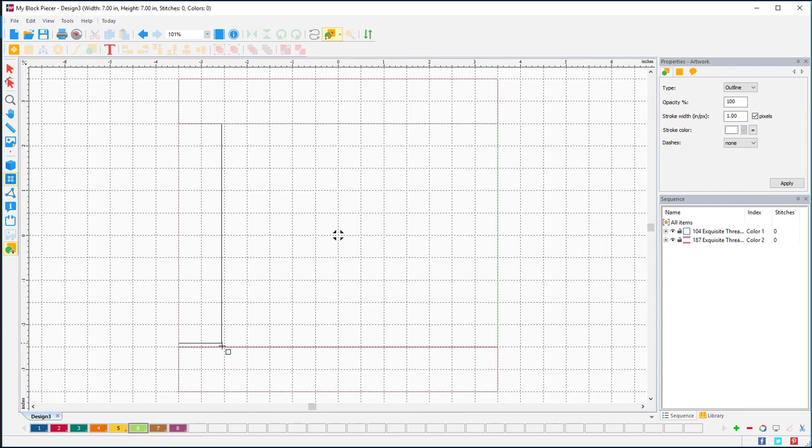And then I'm going to change color yet again. So just right clicking on my little color chip. And here are my side borders. Okay.

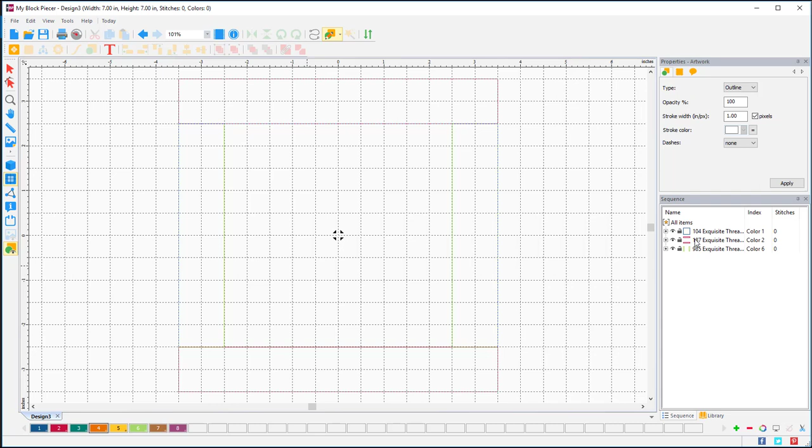Then to get the little triangles in the corner, once again, I'm going to change colors. It just helps over here on my sequence bar. If you change colors for each segment, they'll come up separately here. So here are my top and bottom borders and my side borders. So I've changed colors yet again. So I'm going to put, whoops, I had those highlighted. Click off, now change color.

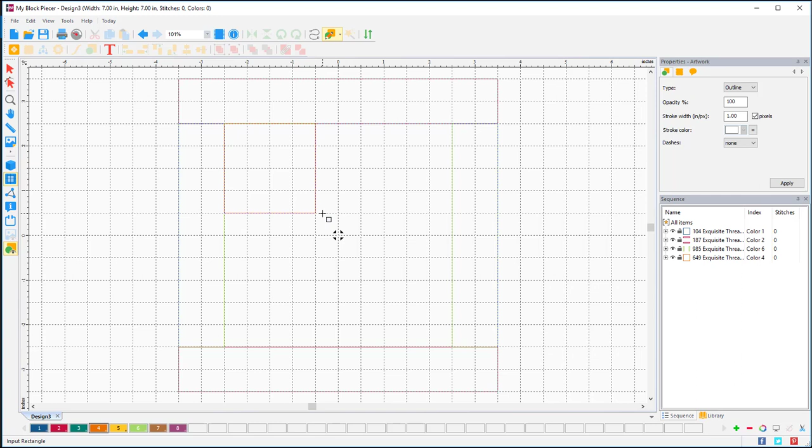So for my little triangles, what I like to do on this is just drag in a square, and then I delete one of my corners. And I think that these were actually 1.5 inches, so I'm just gonna make this 1.5 inches, and then with my shape tool I'm just gonna select my bottom node and then single click left and then right click and say delete point. So now I've got my triangle.

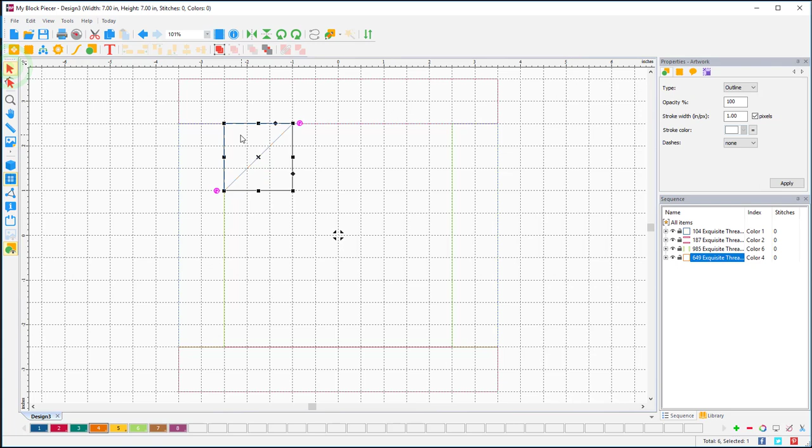So I'm just gonna copy that triangle. Need to get back to my select tool. Copy and paste and then rotate that and then drag it into position down here, and it will snap right in place. You can then actually select both, and you can either just select one by left clicking and then hold down your control key and select the other one. You can also just come over here. If I click off, you'll see this. If I come over here to my sequence, I can just select the heading and they're both selected.

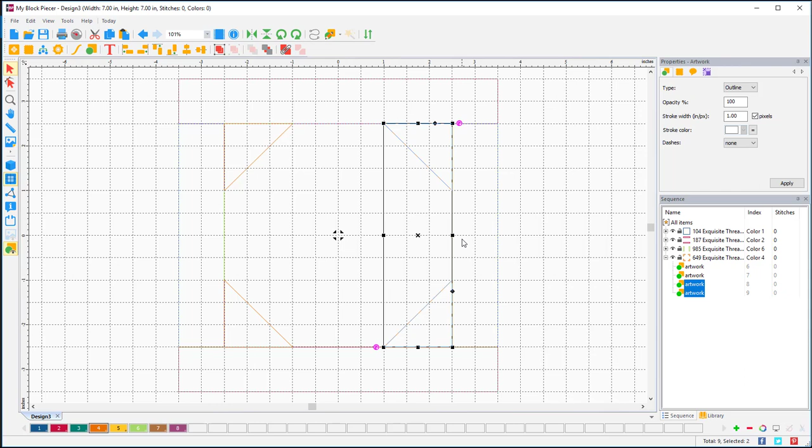So I can now copy and paste, and then I can mirror these and then move them into position over here on the right side. Okay, so a couple different ways to get to the same result. You can either, well, actually 3 different ways. You could have just copied and pasted this and rotated around and then copy and paste and rotate around, or you could copy and mirror, which is what I did. It just saves you a few clicks.

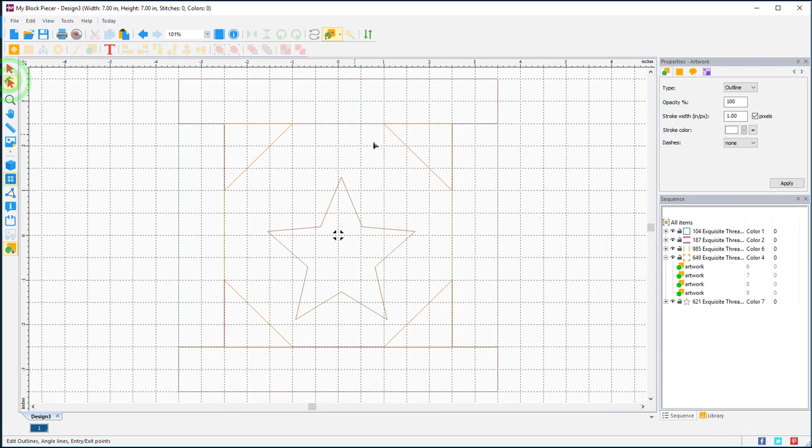Okay, so we've got almost all of our artwork. The only thing that we're missing is our center. So to do that, I'm going to select yet a different color, and then I'm going to go up here to my artwork and choose a star shape, which may seem kind of bizarre because that's not a star shape, but there's a lot of points already in here. So I'm just going to drag my points into position.

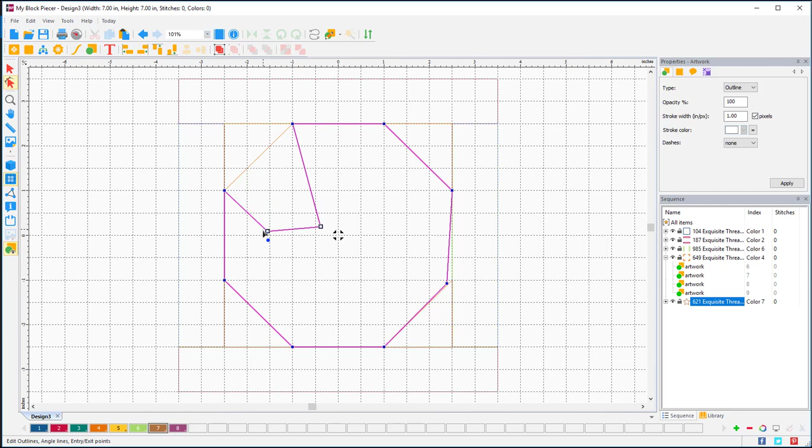I can actually now get rid of these 2 extra points. I did a drag to select and then right click and delete points. I just find that sometimes easier than actually adding a bunch of points. Over here I kind of missed my intersection, so there we go.

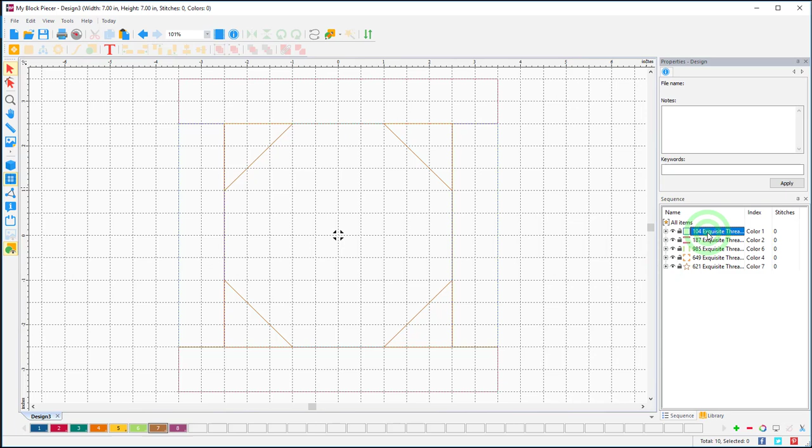So now we've got all of our artwork in there. None of it's filled, but that's okay. And if you collapse this over here, you can see. So now this very first square that I drew, that was just my guideline so I would know where to put my borders. I don't need that any longer, so I'm just selecting it and using my delete key on my keyboard, and now that's gone.

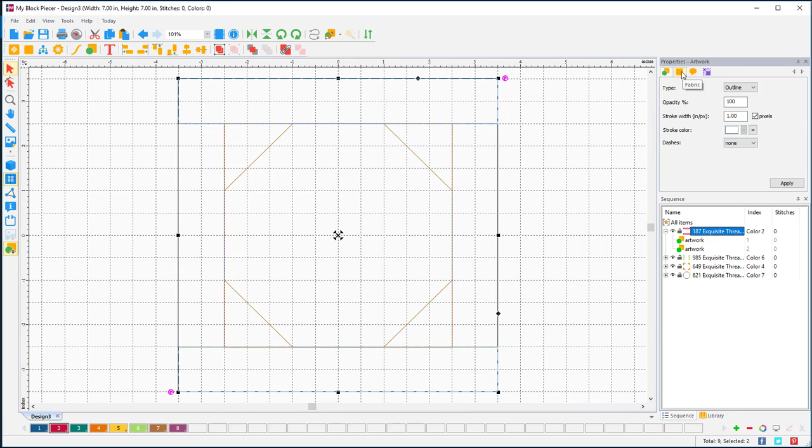Okay, so I can start previewing some fabrics now. I'm going to select this first section and go up here to my properties, up to my fabric tab, and choose my 3 little dots. Depending on what fabrics you've got loaded is what you'll be able to preview. I'm going to go into my beach sewing collection, and this top one is the blue check. I'll scroll down and find my blue check. Because I chose the heading over here, both pieces of artwork are selected, so I'll be able to fill both at the same time, and I can say okay to that. So there's my blue check.

I can do the same thing on the next section. Once again, over to fabrics, click my little dots, beach sewing, and this one was the green check. And then onto my little corners, same process, beach sewing, and this is where you can preview.

So on this particular one, I've actually used the orange check in my sample, but what if I want to choose something different? I can go back and say I want to try the scissors. Not seeing very much of the scissors, so maybe that's not the best one, but I could try dots. That might be a little bit busy, but you can see that you can preview any of the fabrics that are in your collection. All right, I am going to go back and put that back to the orange check and say okay to that.

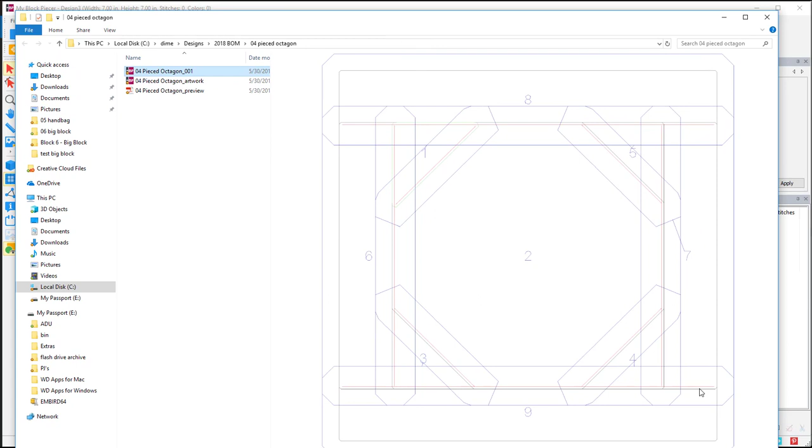And what this is going to give me is, this is your stitching file. This is the artwork that we'll need. I think we'll see the preview here. Can we see that on the screen? Let me get that so it fits. Okay, so here is your stitching file, and here is the artwork file.

There's the artwork, and then you'll get a PDF preview. Let's scooch this over so you can see a little bit more of it. You'll get an image of your block with your fabrics, and you'll get the actual stitching, which is basically this file.

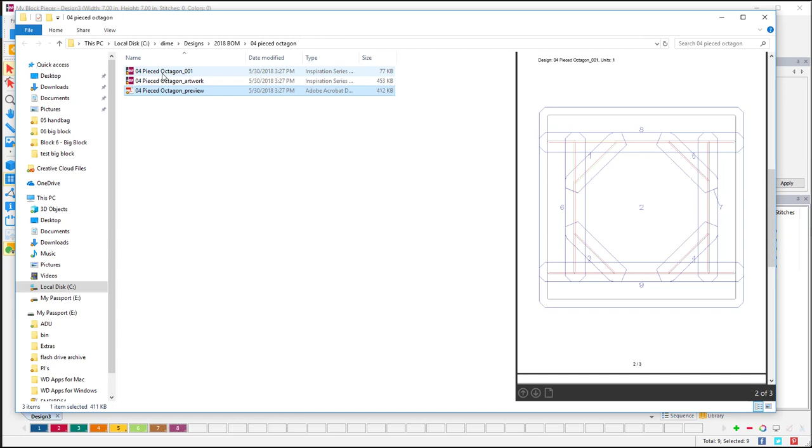This is, to me, the really important bit. You'll get all of your guided step-by-steps. This is for all of your placement, this is your right side tacking, and then your seaming and your tack downs. So handy information to have.

All right, so our block is all set up, so I can just close this now. Then before I go anywhere else, I'm going to go up to my cutting, and I am once again going to choose 0.375. Your seam allowances when you set up for your stitching file and when you set up for your cutting file need to match up, or else things will not come out the way you expect them.

And I have this set to paper, which will automatically send out a PDF file. If you were going to use an electronic cutter, you can set up for that as well. So I'm just going to say apply to this, and it's going to go through and show me all of my sections, everything I need right there. So I'm going to save that under my 04 pieced octagon, and I'm going to just call this cut files.

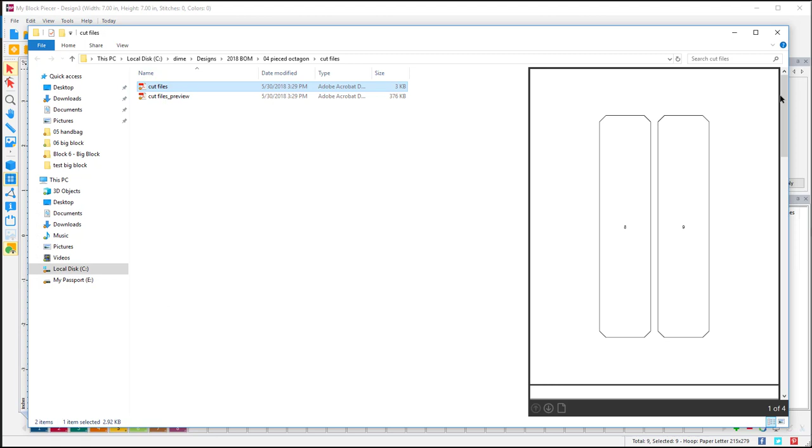Okay, and then once again you're going to get a preview of this, and here are your actual cut files with the numbers on them for your pieces, and then a preview once again. So here's your block, and then this next section is telling you how much fabric you're going to need for each one, depending on how many blocks you chose when you set up your cut.

Okay, so I can now close that, and then I can close out of this, and I can go on over to my quilt embellisher, and we'll get our embellishment set up.

So here we are at my quilt embellisher, and again you'll get your My Inspiration page and free designs. I'm just going to X out of there, and open up a new page, and then switch over here to my library, and here is my 2018 block of the month. So I'm just going to expand that, and here is my pieced octagon. Here's the piece of artwork that I need.

So I'm just going to left press and drag that onto the work area of my screen, and then right click and center that. Okay, so you can see here's the center, here's my 0 and my 0.

All right, so my grid, this time I want my snap to grid on, and my grid settings are at 1/4 of an inch here, and I think that's fine. I actually want to be able to find the center of this, and then also I'm going to set up for my heart, so that will work. Okay, and my snap to grid is on.

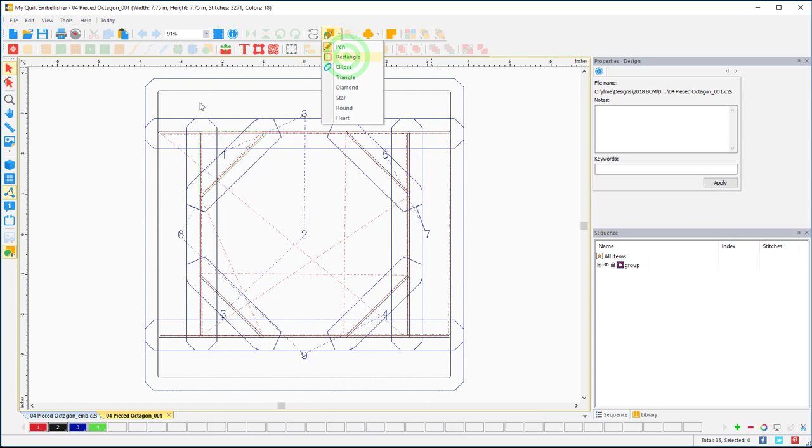So I am just going to start with a rectangle, and I'm going to zoom in up here just a little bit, and I'm using my crosshair and this guideline, and I'm just going to left press and drag, and then I'll adjust. So I can just select this, and I'm going to adjust it over to this line.

Down to this line. Okay, so I'm going to turn this into a run stitch, so it's selected already. I'm just going to choose convert to run, and since it's basting, I'm going to give it a 4mm stitch length. And then I want to apply a color that's like no other color in here, just so it's easy for me to find. I'm going to click on my little plus to add another color, and this is usually crocus. So I'm just going to right click and turn that into that color.

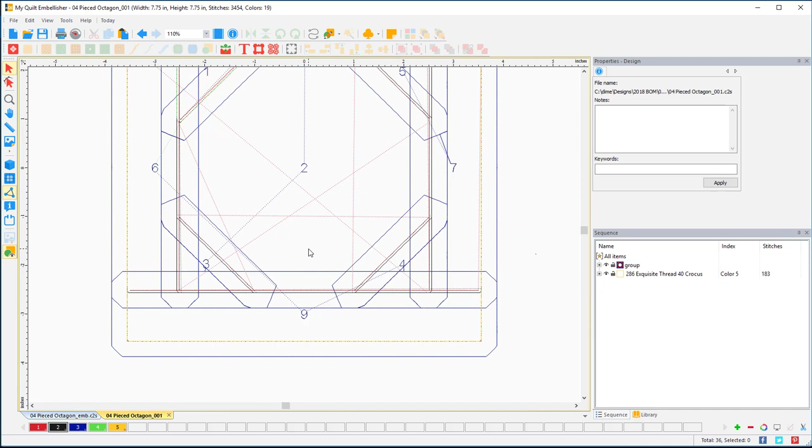Okay, so now my piecing file is set up. So I'm going to go back to my embroidery, down here, and I'm just going to choose all of my embellishments - my center, my top, and my vertical. So I just selected all of those, and I'm going to come up here and say copy, and then go to my pieced file and say paste. And that will paste all of that right in there on top, and you'll know that everything is exactly where it's supposed to be. So the last thing that I have to do...

Okay, so then to keep your pieces in your block maker to start with, we also need a basting border. So I've got this border selected, and I'm just going to copy and paste it, and move the second one down to the very end, which might seem a little bit strange.

But what that will do is then all of these stitches, the numbering will line up to what you've already created in your block piecer, and you're going to actually stitch the last color first to tack your blocks together, and then you'll stitch through everything else, and you'll skip this one when you get to the end. All right, so that's all set up exactly the way that I want it.